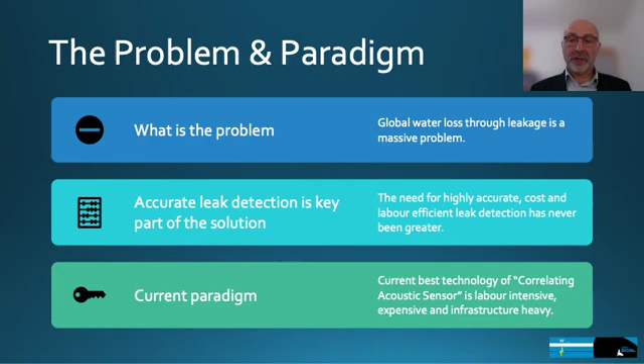Given the size of the problem and the limitations of the current methods, we set out to develop a new technology that makes the leak do something, make it talk to us. I.e., how do we make a leak do something for us which we can detect and then use this information to reveal its location. From this, we invented and patented a new signal transmission technology that is long range and makes the leaks talk to us.

How do we do this? Active sonar generates a small but intense pulse. This is injected into the water, causing 7.5 kilometers of pipe to talk. The pulse travels down the pipe and interacts with points of interest.

These interactions are detectable, and we measure the time it takes for the pulse to go out to the point of interest and return to our sensors. With this information, we're able to calculate the ranges to these points of interest, leaks being one of them. Now I'd like to hand you over to William Smith, our Technical Director.

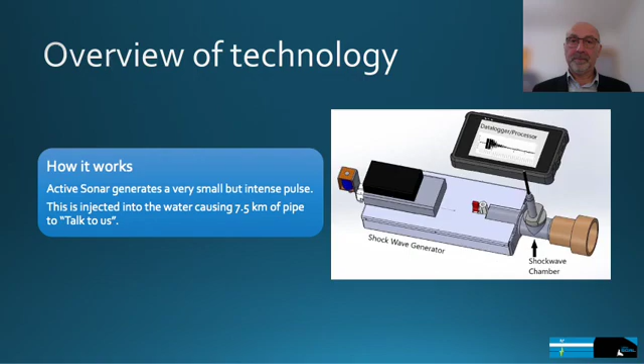Thank you, Michael. Hi, I'm William. Now, just to quickly recap an important point, we have made a breakthrough in transmission technology. This pivotal development makes possible the operation of active sonar in underground pipes at unprecedented ranges. No other system in the world can match this performance.

These are very high signal-to-noise ratio echoes from T's, fittings and pipes. We also get leak data out of those. Significantly, this is 7.5 kilometers from both directions of a pipe, singing with data and noise. No other system in the world can do that. In summary, the pipe talks back to us with a data stream once we excite it.

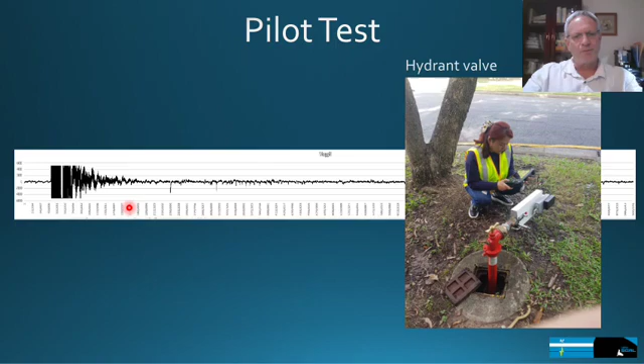Now, looking at the first half of that data, over here on the left, you can see where our transmission wave goes in. The returns quickly settle down, and emerging out of the confusion, we see a whole lot of negative half-wave cycles. These are echoes from T's and fittings and so forth. This first big one is a Sugars Road intersection. That's a major intersection. I'll lay this on a GIS map on the next slide, and you can see how that fits.

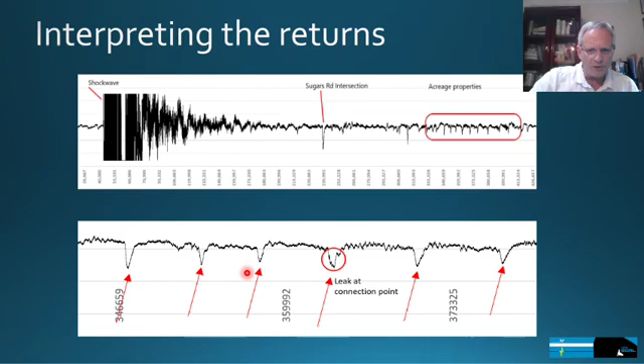Further over on the right, we identified some acreage properties. These are like those little hobby farms there, each fed with 1-inch pipes, and these show up really clearly on our system as well. Now, what's interesting about those is you can see what a normal return looks like. So these are all normal except for this one in the middle. What's going on there? Well, that's what a leak looks like. That's our business. So we're trying to find these anomalies.

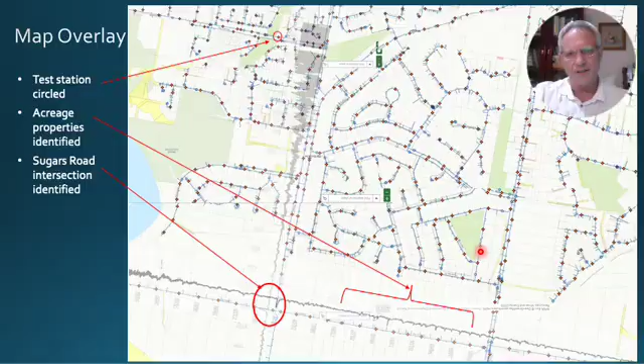So we went out to the site, having identified the tee off where we suspected the leak was, and we did in fact verify a fairly substantial leak. That was later excavated and corrected. Now I'll point out this was 3.6 kilometres away. It was in plastic pipe, and the pipe material has no effect on signal strength. It remains strong. It doesn't attenuate the way sound waves do.

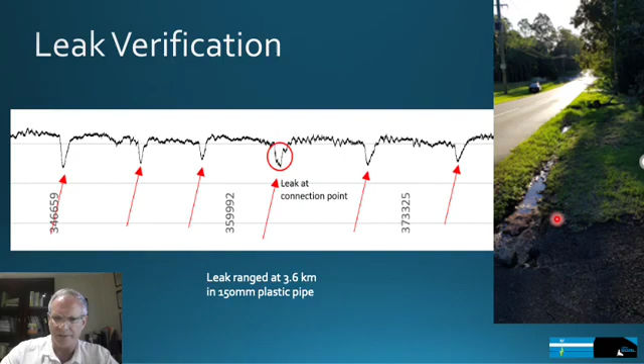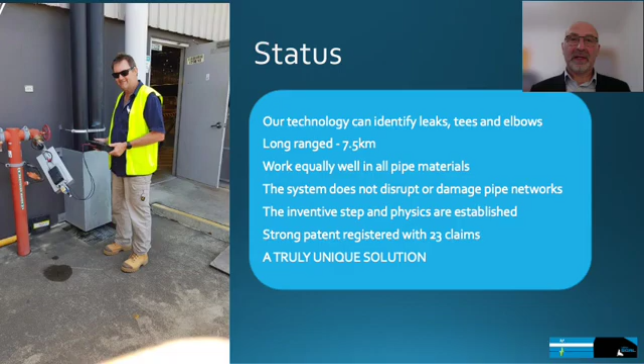So where are we? Our technology can identify leaks, T's and elbows. It's long range. We can detect out to 7.5 kilometres. Importantly, it works equally well in all pipe materials. The system does not disrupt or damage networks. The inventive step and the physics are established. Backing this, we have a very strong patent with 23 claims registered, making this truly a unique solution.

So where's the value in all this? Say for example you had a 10-kilometre section of pipe. We would take 4 to 5 readings to survey. With acoustics, you would need to take 30 plus readings, equally spaced out, assuming there is access to the pipe. With our tech's ability to survey long sections of the pipe along with a 15-minute setup time per reading, labour costs per metre surveyed will be significantly reduced.

A DMA, 5 kilometres by 5 kilometres, would require hundreds of real-time leak sensors in situ. Seal Tech, 10 to 15 units strategically located. We also see our technology fitting in and enhancing other monitoring technologies.

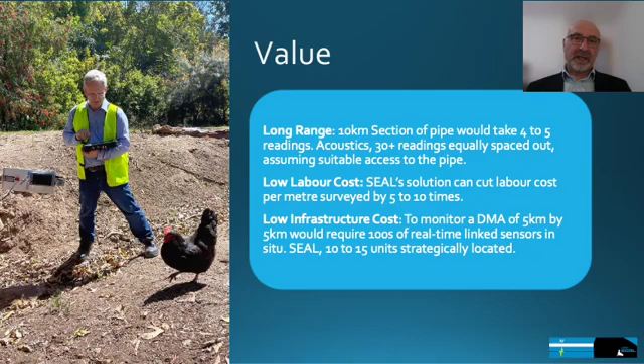We're in the final stages of a standalone unit. Development has already started on a monitoring unit for permanent installations to work in conjunction with existing smart networks. Parallel to all this, we're developing various software packages, feature recognition, map plotting and reporting. Proof of concept trials will be conducted in the UK, US and Europe.

To expand the business, we need to forge partnerships with industrial leaders, utilities, leak detection companies. Revenue generation will be through licensing and subscription agreements.

Behind all this, we have a very strong team, headed by Dr. Duncan Hewell-Evans. He's the original inventor of the concept, supported by Ying Lee and William Smith. Other key members, James Bess, Dr. Leonard Kasser from the University of Pittsburgh, myself and Dorothy Nashe.

Thank you for taking the time to watch this SEAL Water Tech presentation. I trust this brief introduction has provided a clear understanding of our breakthrough water leak detection technology.